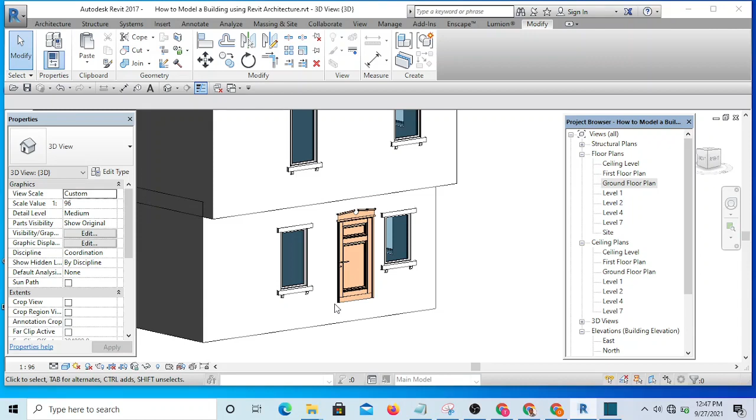This is the project we have been working on, and we are going to be continuing it. Without wasting your time, let's get started.

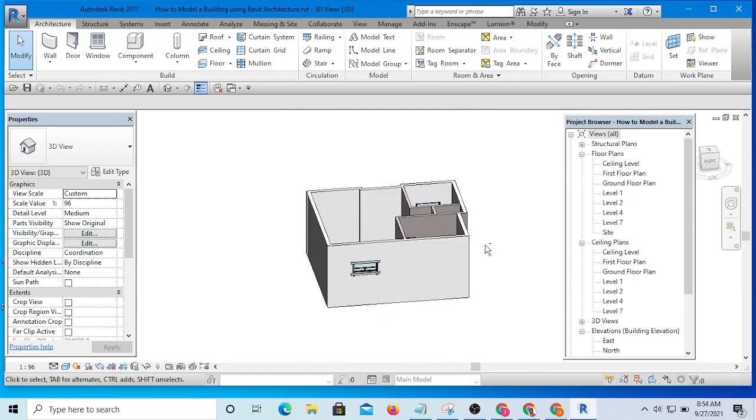I will need to be loading some windows from some of my projects. So as I've opened this one now, I'm going to open the second project so that I'll be able to load some windows from that project into this particular project.

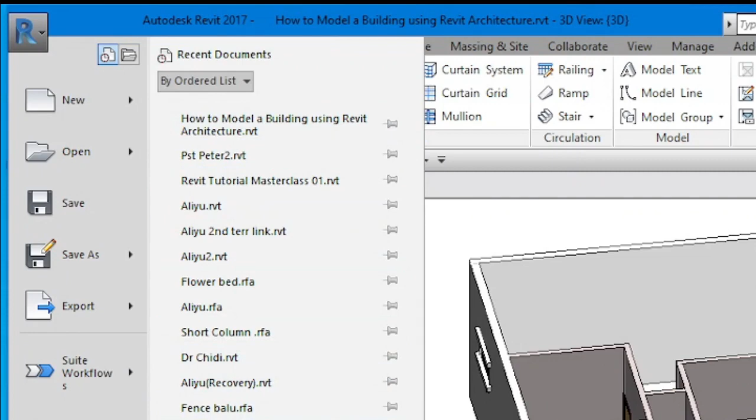This is one of them. This is the particular one I want to load window and door from.

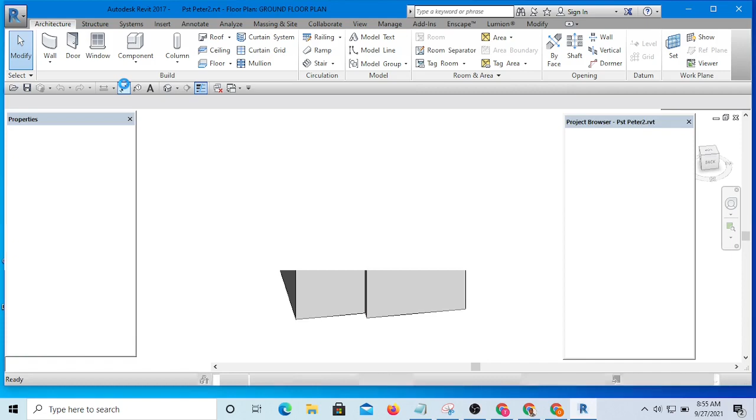So I'm going to click on it to open it up so that I'll be able to load doors and windows from there. I want it to be the exact door and window, okay, you can see this one.

I want to load this one into that project. So I'll simply select it, then hit Edit Family.

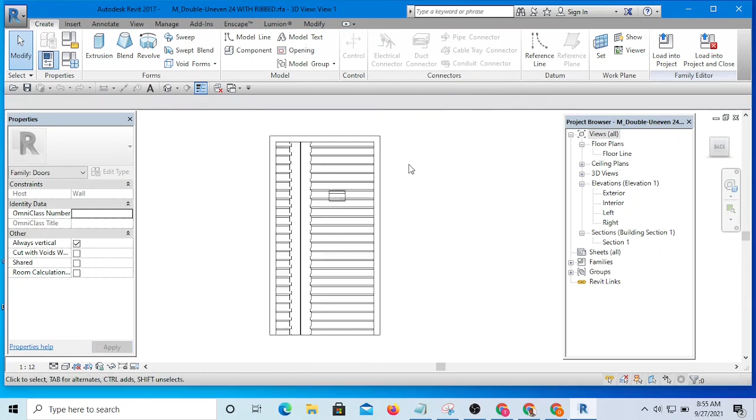While it is open in the Family Editor, without tampering with it, I'm going to click on Load into Project, and you now see that there are two projects that are opened.

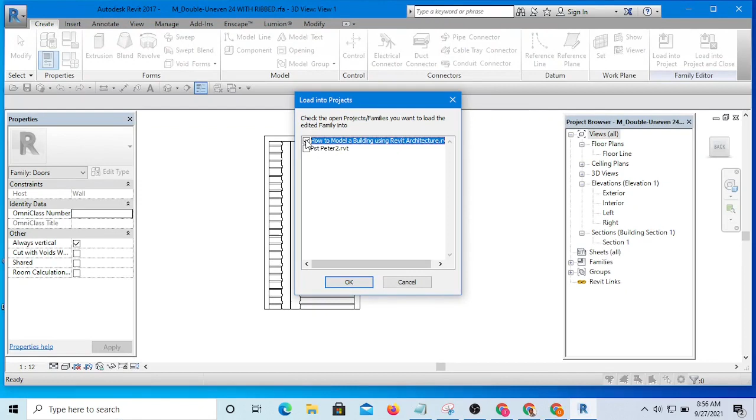This is the one I'm loading it from, and this is the one I want to load it into. Simply select this one I want to load it into and hit OK.

And here it is. So I can place it. That is where I want to place it.

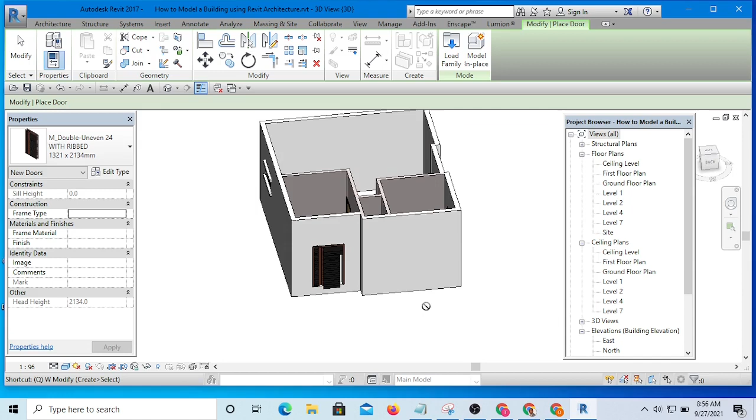Okay, so I can go to my ground floor plan, and okay, sorry, this is not the place I'm supposed to place it.

I will simply select it and click on pick a new host. This is where I want it to be, and you can toggle it.

If I want it to face inward, I will press on my space bar. I'll press it again. You can see it's turning.

Okay, if I move my mouse now, I move my cursor inside, it's now going inside. This is what I want. So I'll click. It's not responding.

Since it's not responding to pick a new host, what I will do is let me click on create similar.

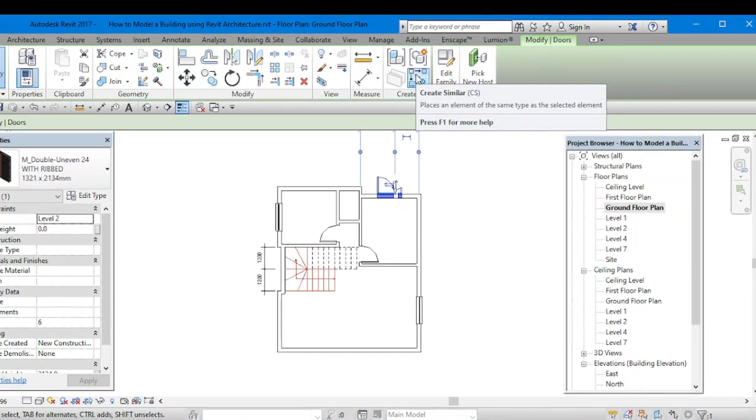Then I can now place it here and hit modify to escape from that command.

Okay, now we have two doors. I am going to delete this, and in deleting I can select the door here and hit delete.

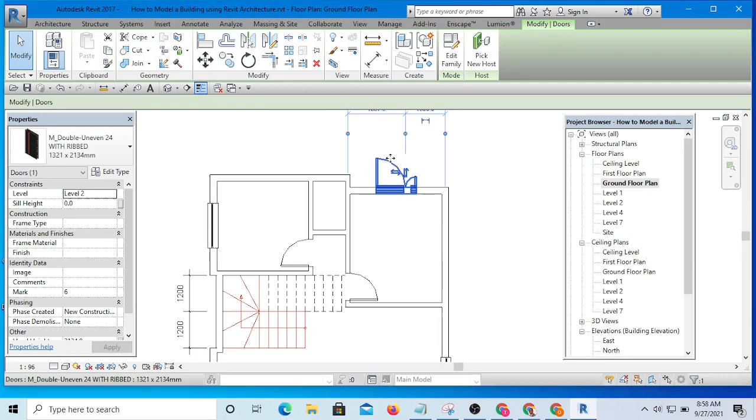And it is gone. Okay, so let me go and load the windows from that same project. Now, since the project is open in the background, I can click on this switch windows, and I will see other views that are open.

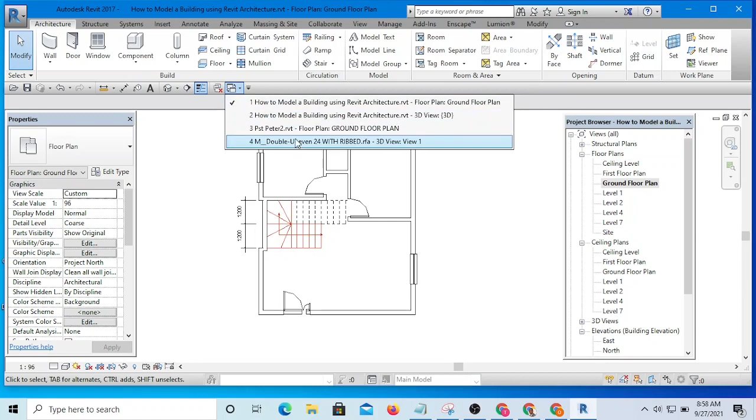So let me look for the project. This is the project. Then I will open it.

Okay, here we go. So I want to select this window and load it into that project. This is the kitchen window.

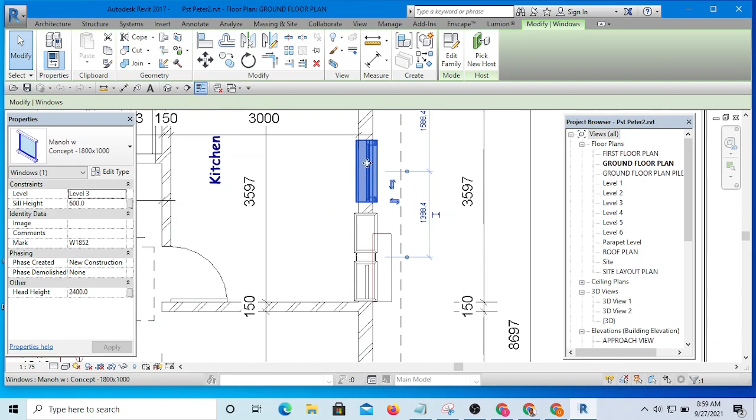I will select it, edit family, then load it into project. The project is selected and hit OK.

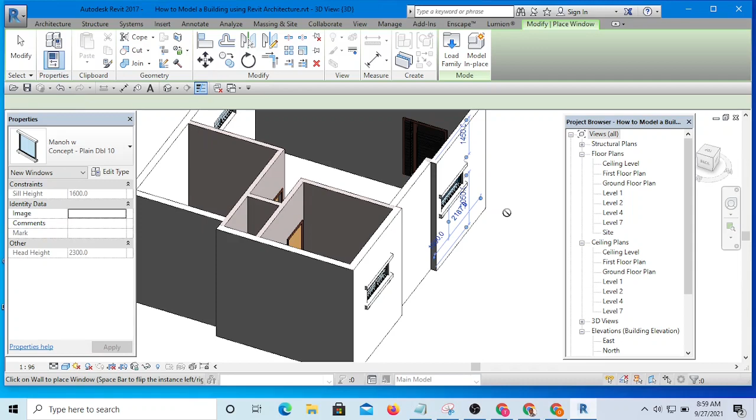And here it is. Oh, where is my kitchen? Sorry, this is my kitchen, so I'm going to pick a new host.

I pray that it will work this time around and place it here. Okay, so pick a new host has worked.

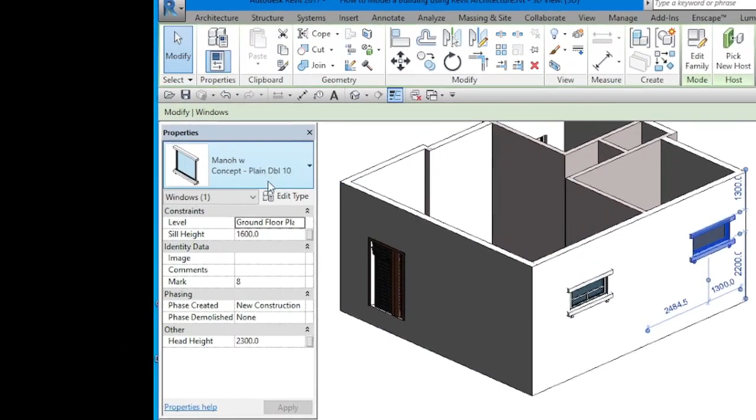Then the height I want it to be, let me edit the height. I'll click on edit type, then go to the height. Okay, you can see the height.

I may want to rename it, or let me duplicate it so I can give it a name I'll always remember, and the name will tally with the size. So I'm going to give it 1200 by... 1 meter, that means the height is 1200. Or let me use 1500 by 1 meter, so the height will be 1500 and the width will be 1 meter, and hit OK. Okay, so that is the name.

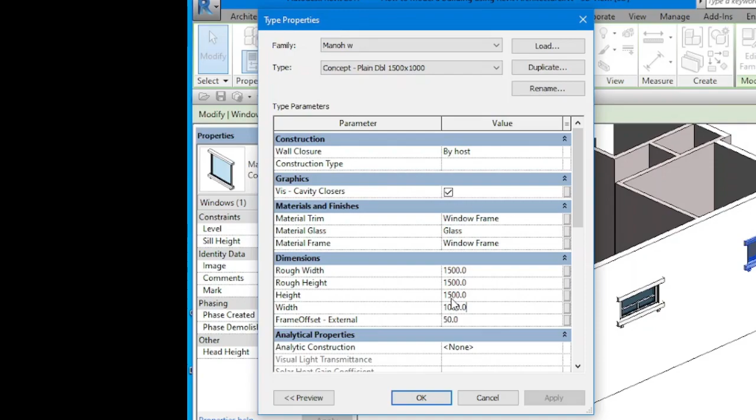Now let me work on the parameters. This is the height, it will be 1500 and the width will be 1 meter. You notice that the moment I change the height, the rough height also changes, meaning you can always edit either the rough height or the height and it's always the same. So I'm going to hit OK now, and you see that the size has changed to exactly what we want.

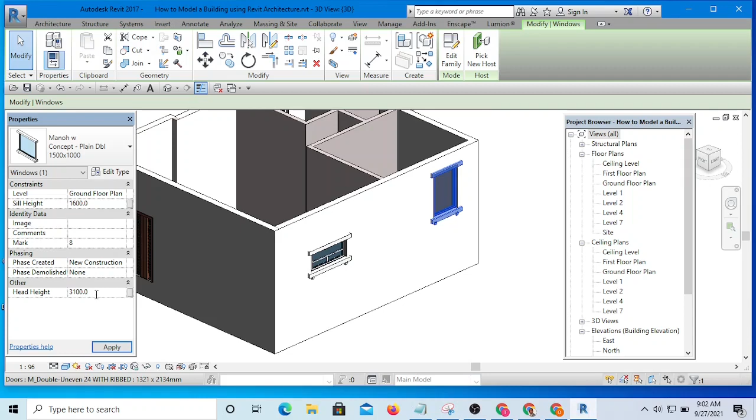So I'm going to select it, and the level I want it to be is already on level 1, the ground floor level, but the height is not what I want. I want the head height to be 3.1, that is 3100 mm, and hit apply. Okay, this is the height I want it to be. All right, so this is...

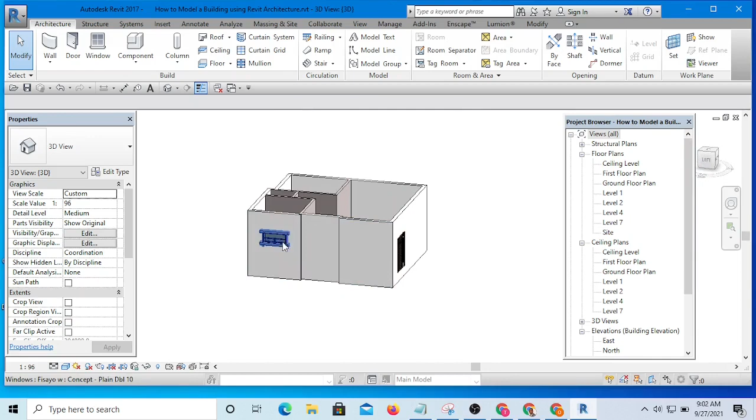Let me delete this one for now, and I'll also delete this because that is not the type I want to be there. Okay, let me go back to my project.

I'll open it. Okay, now you see this little button here. This button is used to close other windows that are not necessary, that are duplicates. And you have this one if you have Revit 2017 and above. This tool does not exist in Revit 2015.

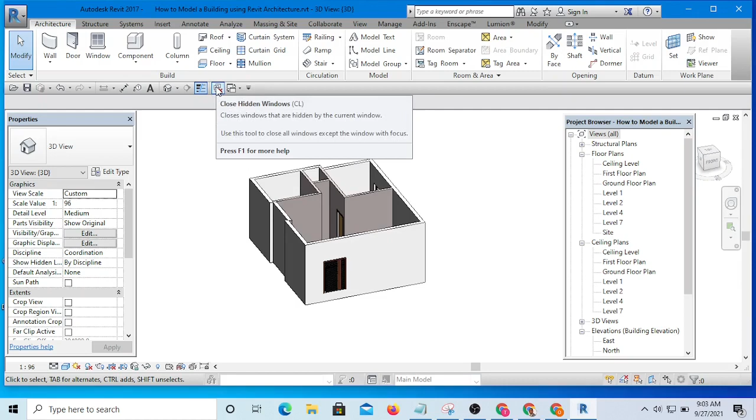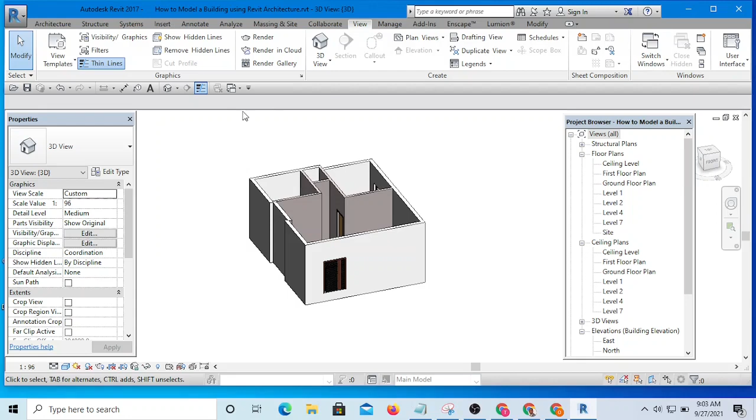But if you want to get it in Revit 2015, all you need to do is go to your View tab. If I go to View now and open that view tab, you will see Close Hidden Windows. So if you click on it, it's going to close other windows that are not necessary.

We have 4 projects that are open at the background, and this is the one I want to load some family from.

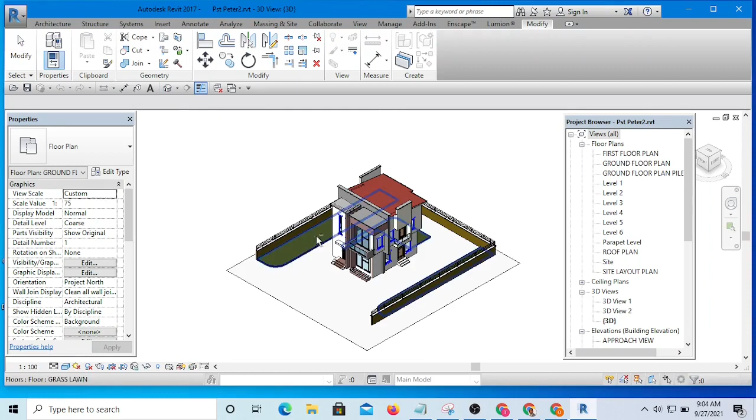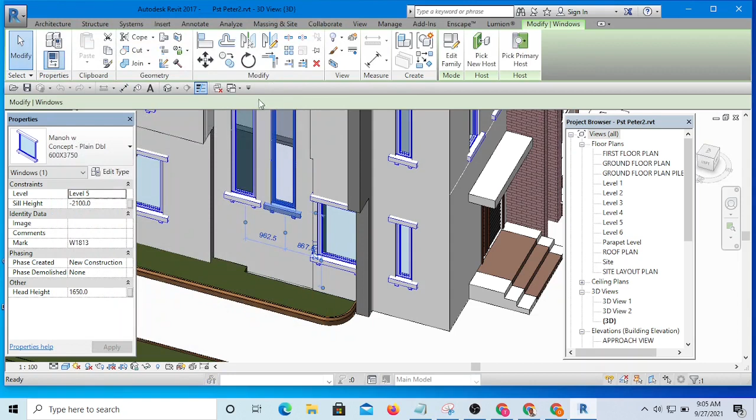Let me open it in 3D so that I can... okay, you see, I have already loaded this into the family. It's just to know the size I want to use. The size of this one, if I want to know the size, you can see the height is 3750 by 600. So let me go back to my project.

This is the one we are working on, and simply select this window and place it here. Okay, so I can go to my ground floor plan.

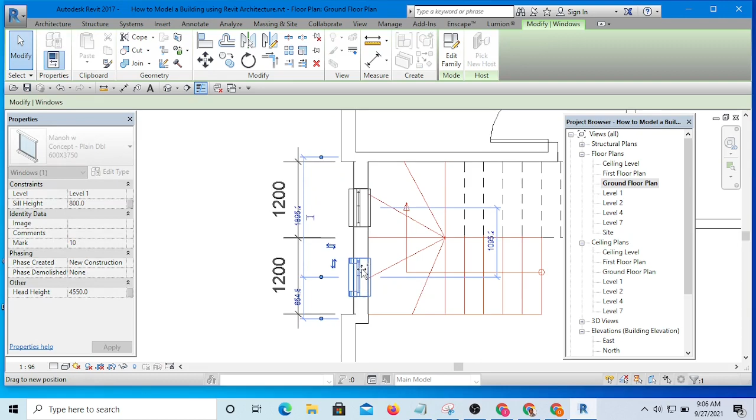This is it here. Then select this window and click on it, and let me look for it. This is it here, so I will select it. Okay, and if I want to create the second one, I can select it, hold my control key and drag and place. If you look at it in 3D now, you see that is the same type that we have in our project case study.

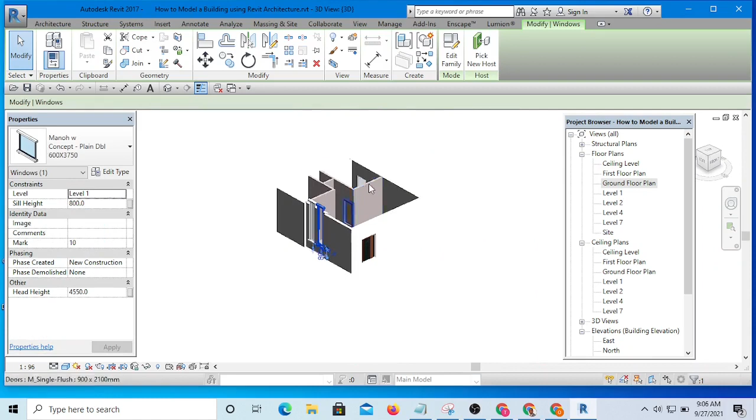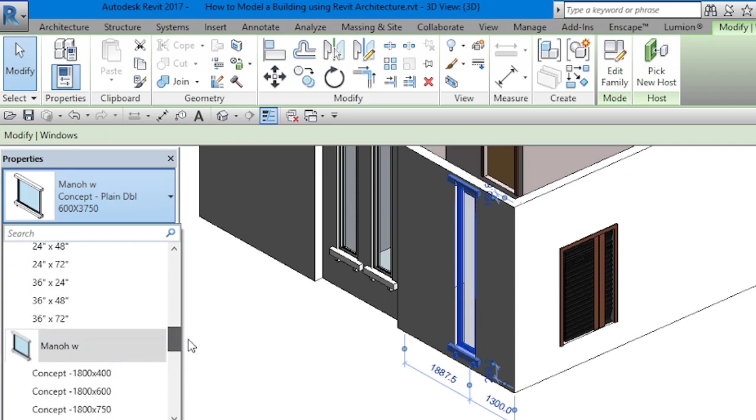Okay, then I can create this same type and place it here, and this one should be, the height of this one should be 1800. I want the height to be 1800. I think I have that type. Okay, this is it here, and hit apply.

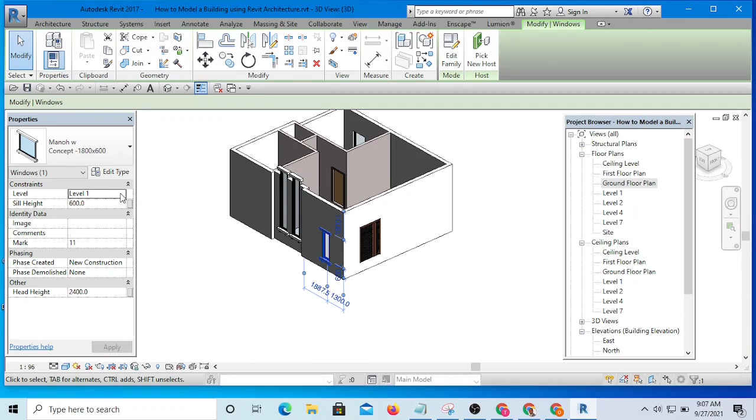The head height should be 2400. It's not what I want yet. Okay, the level should be in ground floor, and hit apply. Okay, so that is what I want.

Then let me go to the floor plan. You can see those windows are already here. Okay, then I need a window for this place. I think it's the same type of window, but this is for the living room, so it's supposed to be wider and higher.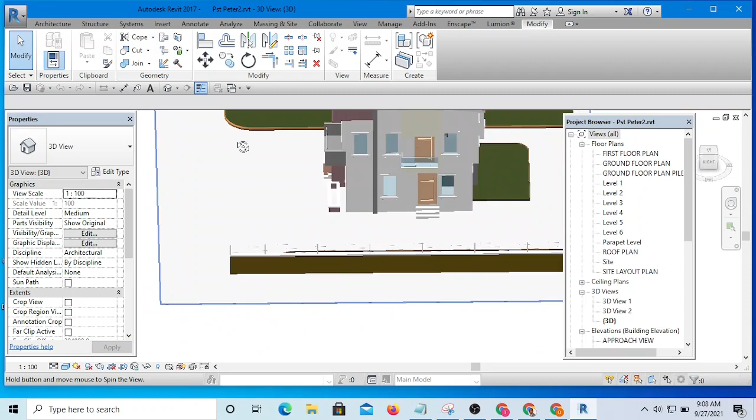Let's see what we have in our case study. Let me close other windows, close other windows. Okay, let's see what we have there, because we want to model exactly what we have here. The height is 1800 by 1 meter.

Let's be sure by editing it. Okay, here is the parameter. The height is 1800 and the width is 1 meter.

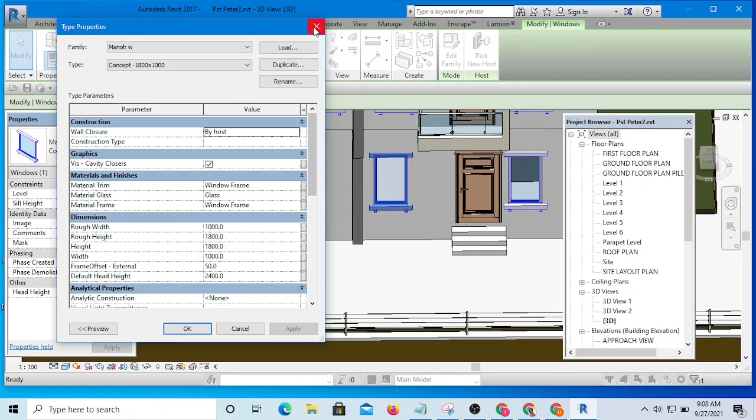Okay, we'll go back to our project. This is our project.

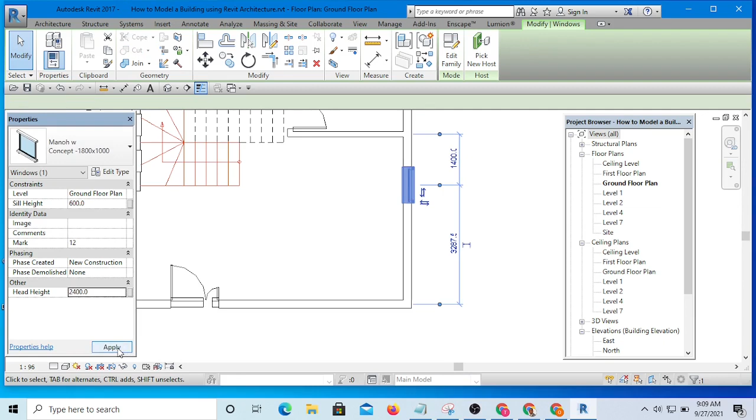So the height of these two - no, we only have one, so I'm going to delete one and move it. The height should be 1800 by 1 meter. Do we have that type? This is it here. Okay, then the head height should be 2400mm. Apply, and the level should be in ground floor.

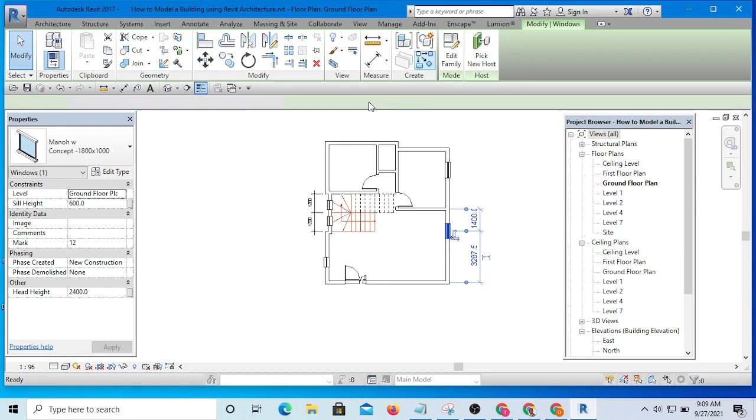Okay, so we have placed this. Then we also need the window for these rooms. To do that, I can select this same type of window and place it here, place it here. Then I can also select this same type for the kitchen and place it here.

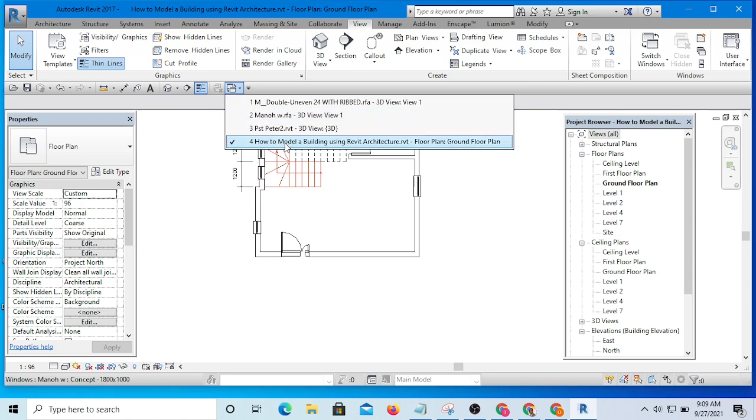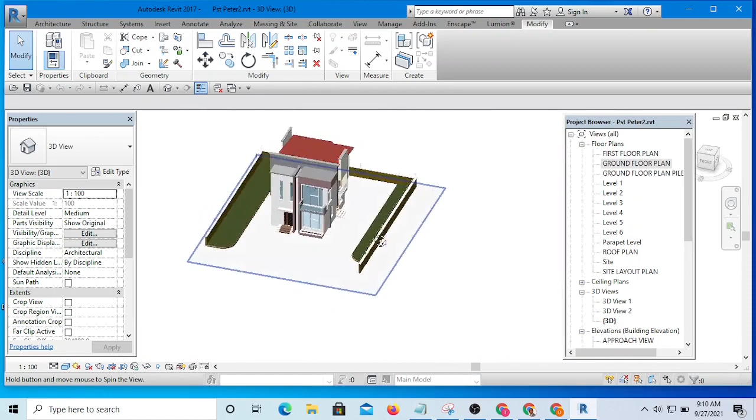Okay, then what do we have here? Let's see in our case study what we have there. Okay, so in our case study we have a wide glass window. This is wide glass, and what I use here is curtain wall.

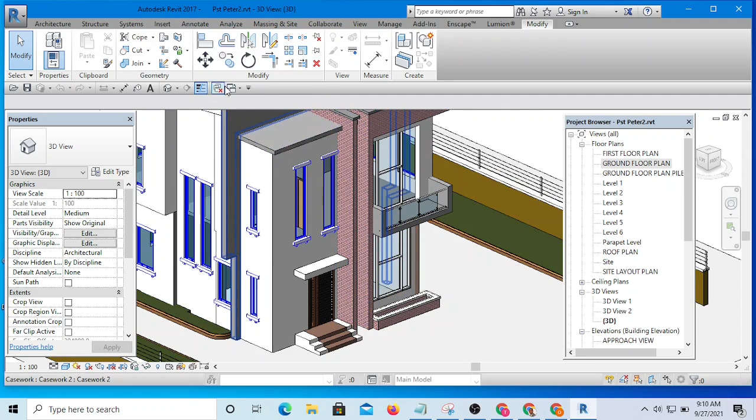So I use curtain wall to do this, and I'm going to use curtain wall to do this as well. So I will go to our project, and before I do that curtain wall, I need to have those two designs here first.

And before I create that two design, I will have to create my first floor first. So we are going to leave this one for now until we create our first floor.

Okay, then there is something we still have to do here, and that is the door for this toilet and the window for this toilet. And there is another door, another exit door to the kitchen. So I'm going to load that exit door to the kitchen.

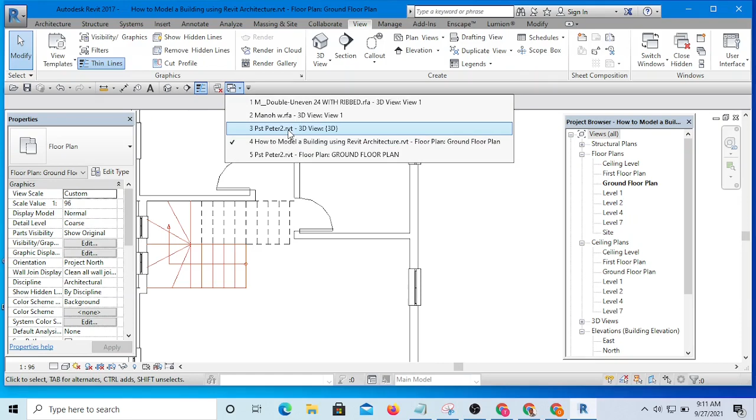You see how the door is. If we open our case study, you can see this is the door. This is the door we modeled in one of our family, Revit family. So I'm going to click on edit family,

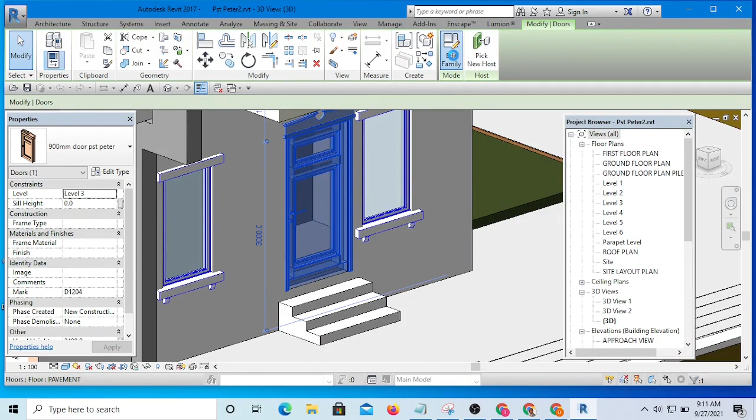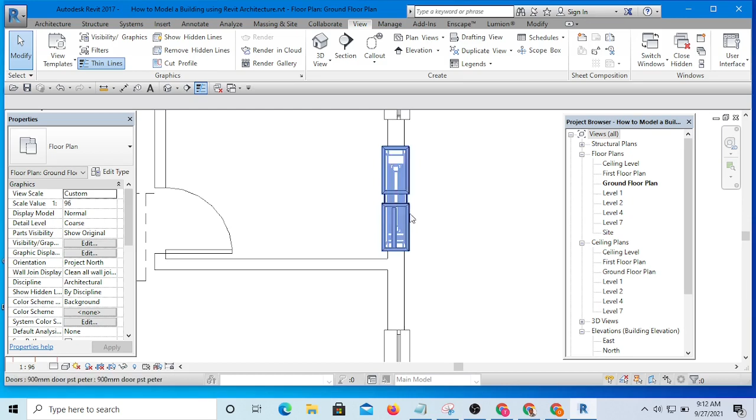then load it into the project, select the project, click OK. And this is where I want to place it. Now, this is the way this door looks on the plan, and I don't like it, but I'll work on it later. For now, we are not bothering ourselves about the plan view now.

I will have to work on the plan view so that it will look like this. But for now, let's not bother ourselves, because what we are learning today is how to place a door, not how to edit family. So when we come to how to edit family, we will modify this plan so that it will look something like this.

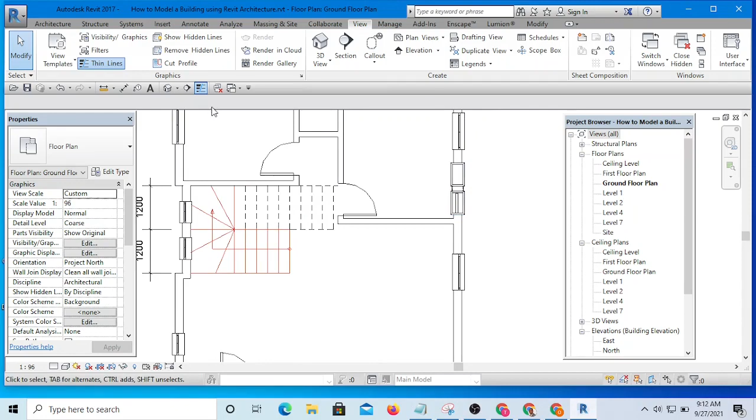Okay, so if that is taken - but for now I want you to know that this is a door, and if you look at it in 3D, you see that it's actually a door. Here it is. Okay, so let's go to our plan, our ground floor plan. Then I need a door for this toilet,

and I can use this same type of door. Select it, click on create similar, and place it here. You are done.

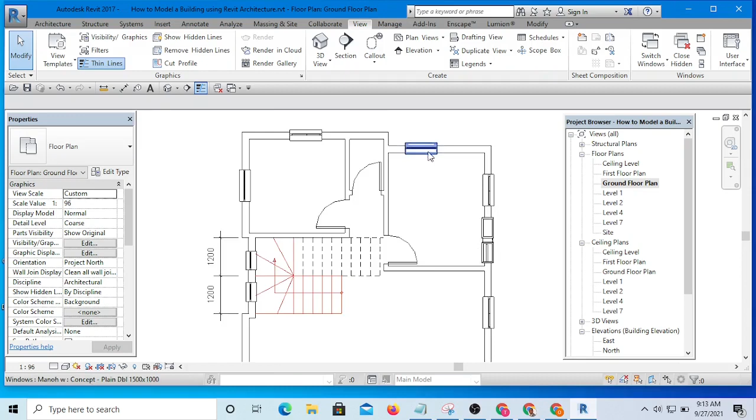Okay, then we need a window for this toilet, and we may like to use this same family. Select it, click on create similar, and place it. And if you place it, you see that it's too big for the toilet.

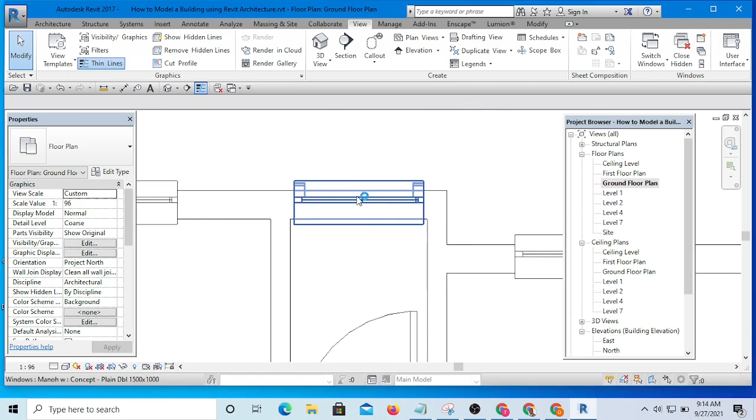I want to edit this window to be a toilet window. That should be something like 600 by 600 or 600 by 900. Let me use 600 by 900. The height will be 900 and the width will be 600.

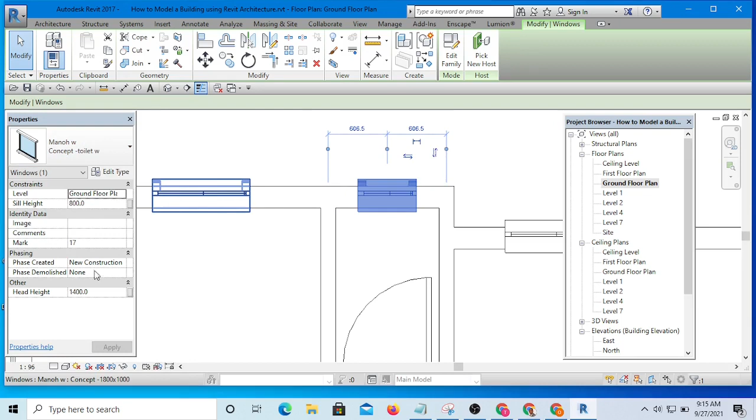Do we have that type here? Let's see if we have that type. We don't have that type. What we have here is 600 by 600, so without wasting time, the head height should be 1400mm, and hit apply.

Okay, so we have been able to place all our doors and windows. So the next thing we'll be doing is how to create our first floor and annotation.